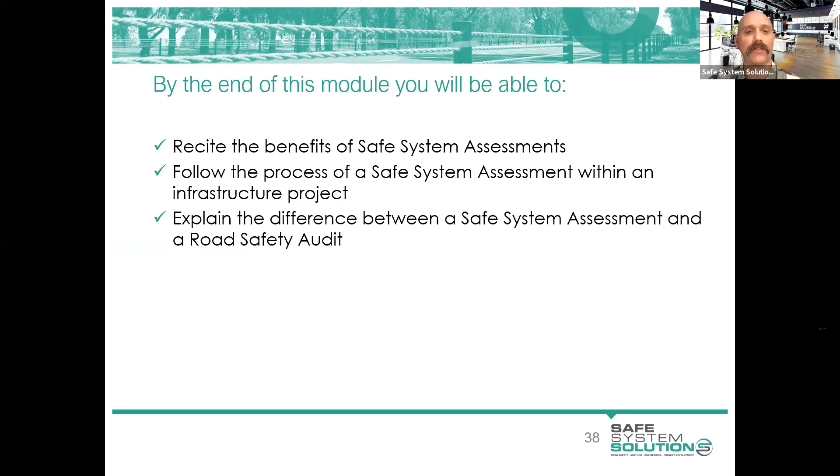So this module really is talking about that process and wrapping everything up. We want to talk a little bit about the benefits of a safe system assessment, and I'll show you some research that was done in terms of evaluation of safe system assessments. We'll look at how a safe system assessment fits within the life cycle of an infrastructure project, and the difference between safe system assessments and road safety audits, which we've talked a little bit about.

What the evaluation of the effectiveness of these safe system assessments did was take all of those and use a crash prediction model to look at how many fatal and serious injuries we would predict on these roads over a 20-year period. So there's the existing roads if no projects or alterations were done, the original design handed over to be safe system assessed, and then the high safe system alignment one from the safe system assessment, what the safe system assessors were recommending, with some acknowledgement of the context of the project, and what would generally be pushing boundaries but still possible.

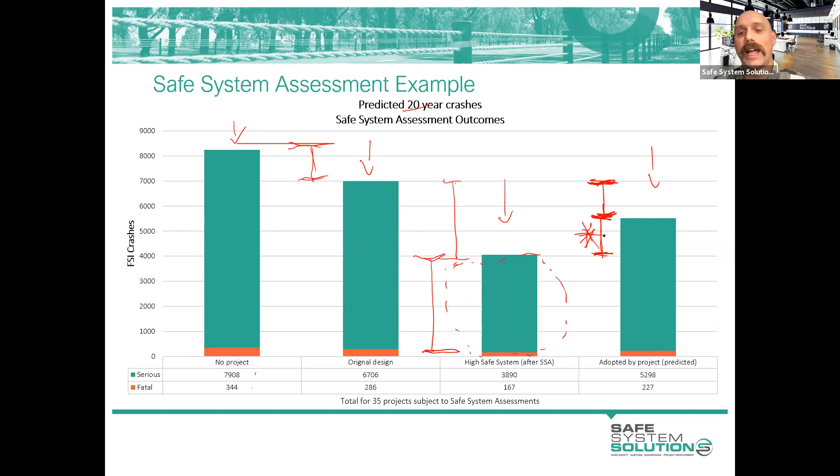Cost certainly was an element in some of these, not all of them. In terms of, they said, well, we'd like to do that, we can't afford it. Maybe grade separating some of the interchanges that were proposed. But certainly there are a lot of things that can be done in that space.

There were a number of the safe system assessments that actually, after accepting what was put forward, would cost less. And those were mainly the big town bypasses, because the whole cross section back when these were done, maybe 4 years ago or something, but still that very much that really huge road reserve, big separated carriageways, big median in the middle, buy all the land, clear all the trees, have massive clear zones was the way that this was operating. And certainly the safe system assessment showed a much smaller cross-sectional envelope that had continuous barrier systems, which in a number of these cases would be a much cheaper solution.

So that was interesting. That one we're going to have to continue to work on and keep pushing our industry, because it's stuff that we know about now and we can do, and we may need to lobby other ways to make that happen.

Ken, can I just jump in with some clarification questions, please? Definitely. Thank you. So just whether it's crashes or people injured or killed - the 227 in the last column adopted by the project, are they fatalities or are they crashes? So they're crashes. I'll be able to forward the actual report, but my understanding was they were crashes.

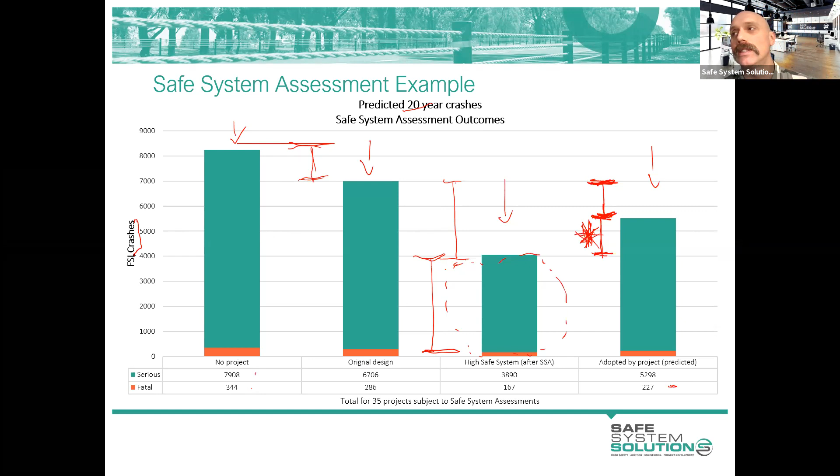So we know, well, most of these projects is sort of a 1.1 maybe in terms of crashes to people, something around that. So yes, the actual people results may be slightly higher than that, but I think this is giving a generally a fair indication of what we're up against.

Thank you. How did you derive the numbers of deaths and serious injuries? Yeah, so we did not. This was done by Blair Turner when he was at ARRB, and I think a lot of you will know Blair Turner, a New Zealander originally. Blair used basically a modified ANRAM IRAP sort of methodology based on the risk score and the predicted FSIs using those characteristics and accounting for growth as well in that.

So like the town bypass, for example, the 'no project' option was basically that all the freight and cars continue to run through the town as they currently are, and crashes are going to go up by this amount. We used the crash prediction model, combining infrastructure characteristics plus crash history, to give a predicted fatal and serious injury figure over a number of years as things go up. That was the methodology used to produce those numbers.

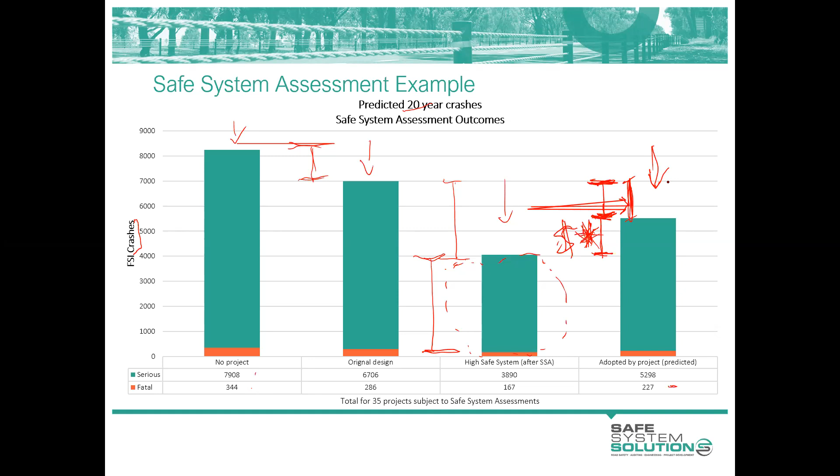Anyway, it's interesting to look at it all, and I think we've got a huge amount of work to do. That tells us a story about how much work we've got to do in a whole lot of areas. And this one, I think, is what we're going to be spending a lot of time focusing on — getting our own backyard in order, getting some politicians on board, looking for some courageous leadership, and pushing things pretty hard.

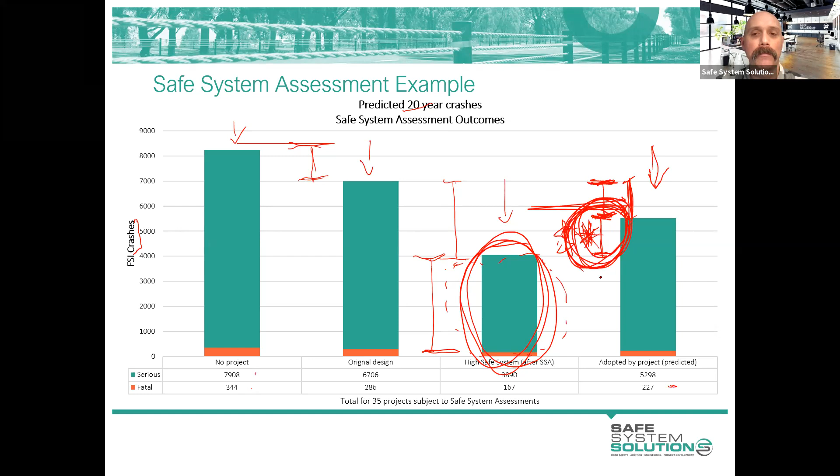Some of the benefits, just dot pointed here, and lots of words on this, but I think you hopefully will have seen that a safe system assessment is a way of determining how well a project aligns with safe system principles. It's not giving a tick or a cross, as in that is safe system or that's not safe system. It's saying this one aligns very well with safe system principles, this one not as well.

Method for comparing project design options from a safe system perspective. I do really like that when you're in there at those stages of a project development where they're doing their optioneering. They've got 5 options on the table, and you're able to show which one aligns better with safe system principles.

But you don't end there. You're also saying for each of them, or their chosen one, these are other things that can be done to get it to align better with safe system principles. And certainly, I don't think a road safety audit ever really does that comparative analysis. It shouldn't. That's sort of part of what road safety auditing is not—it's not a way to compare projects, but this does some of that comparative analysis.

Information on design changes that will move a project closer to the safe system objective of eliminating the risk of fatalities and serious injuries. So yeah, just injecting those things to further move things along. Method for assisting planners, designers, project managers to move their projects from this safe system theory to practice.

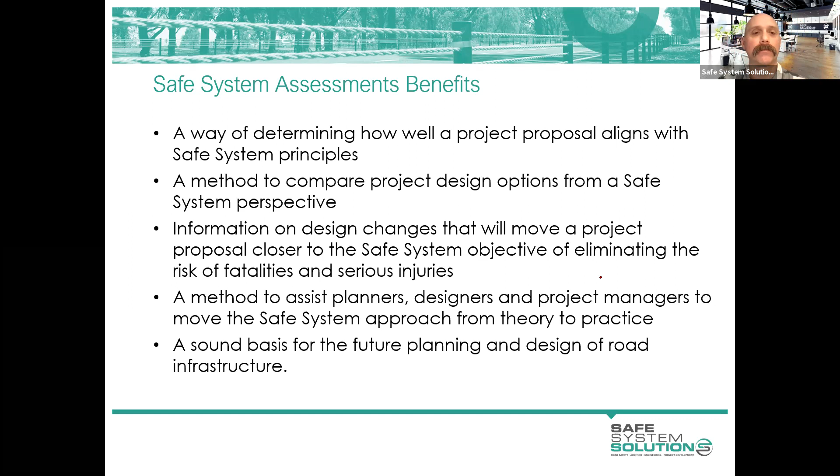Any questions at this stage, Kathy? No, just some more commentary on Japan, I'm afraid.

Okay, well that's all good. All right, so I want to show you through some process guidance, almost policy related stuff as well, and get you to be ready to get out there and really implement safe system assessments in New Zealand in the most effective way.

We don't want them done if they're not going to be adding value, and that's really pretty much it—you don't want to be adding red tape to an infrastructure project.

Early stages, these safe system assessments are really providing that value. And we feel that they're not quite the right tool once you're into the details of a project and the detailed design. That's one where past experience has come into play.

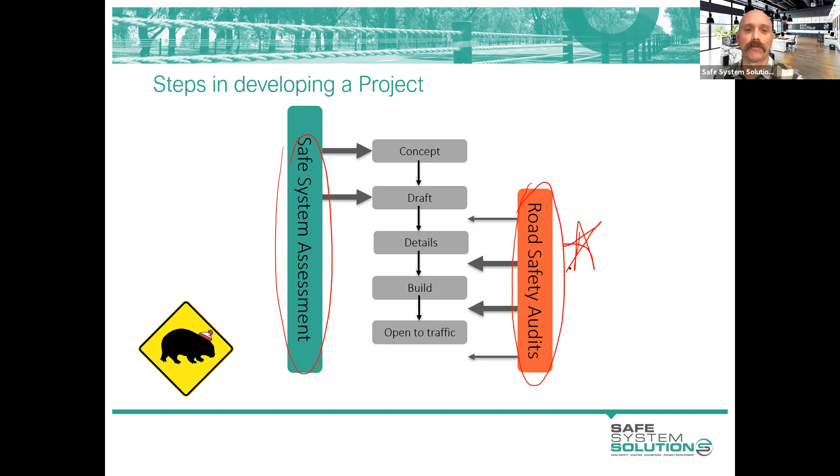And you sort of go, well, bloody hell, okay - we're de-scoping now the project from safety features that we know are proven. Now that's just a capability and capacity issue with road safety auditors in safe system knowledge and the most current road safety infrastructure thinking and the like. So that's how that one really needs to be worked - but also them referring back to any safe system assessment done at an earlier stage to understand what's being pushed, and maybe have that discussion with the safe system assessor rather than de-scoping a project like that or changing it.

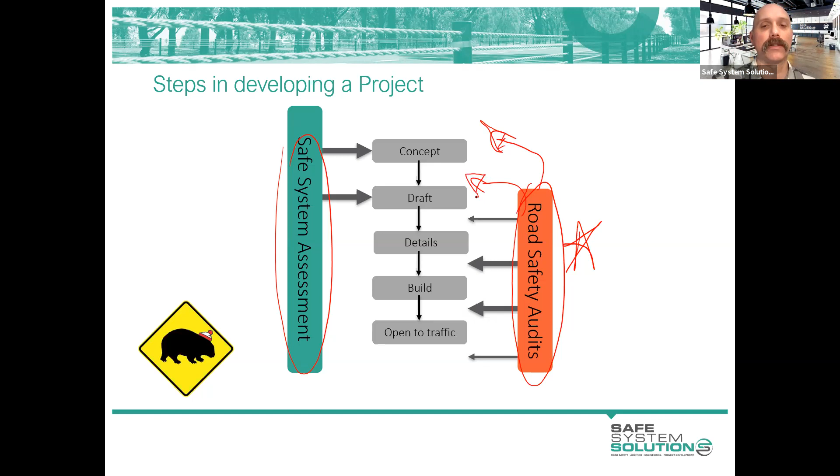Identify issues that deal with the likelihood of crashes - well, both a road safety audit and a safe system assessment do that in a really good way. And I'd dare say that likelihood cell or row of your matrix in a safe system assessment is very close to a road safety audit in a traditional sense.

The severity is sometimes looked at in a road safety audit, always looked at in a safe system assessment. I say sometimes because it's certainly part of risk assessment to look at severity, but sometimes it's ignored in the sense that a road user would have to have error in order for that severity to precipitate, if that makes sense.

The classic example being red light traffic signals on a high-speed road - piles and piles of audits coming in that don't at all mention running of the red light in terms of severity aspects. They're all about the likelihood - sight distance to the signals, use of mast arms or LEDs, line marking on the approach - and then it's sort of ignored once the red light running happens.

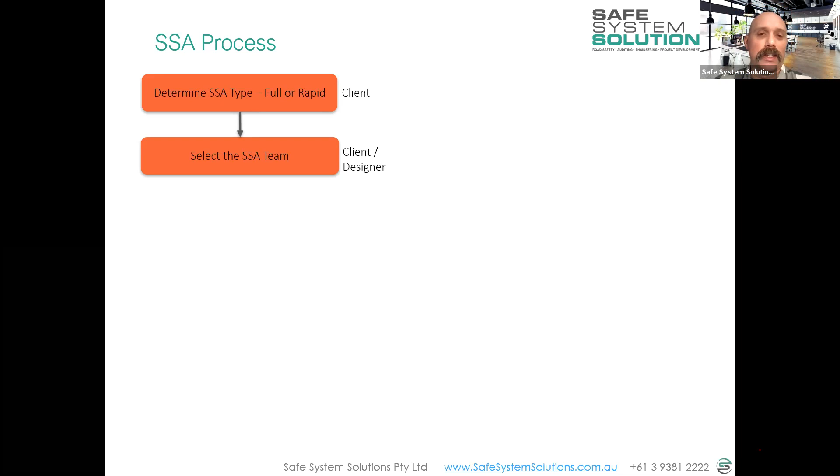And then the assessment team is selected. In terms of how do they know that somebody's got a base level of competency in safe system assessments, again there's not much out there. Victoria publishes a list of recommended safe system assessors, which I'll show you where that is shortly, and South Australia is about to do the same. But no other jurisdictions have really got on to doing that. Certainly I know that New Zealand doesn't go down the track of publishing a register of road safety auditors, so I'm not sure you'll go down the track of publishing a list of safe system assessors if you're not doing it for auditors. And there's administrative challenges associated with doing that, of course.

Then there's some sort of commencement meeting or discussion between the designers and the client, in this case the project manager of the project, and the assessment team. This can often be done in the same package where you're defining and understanding the project context, as we talked about last module, where we were honing into what's the purpose of the project, what's the function of the road, what are the volumes, why is this being done here, all of that sort of stuff.

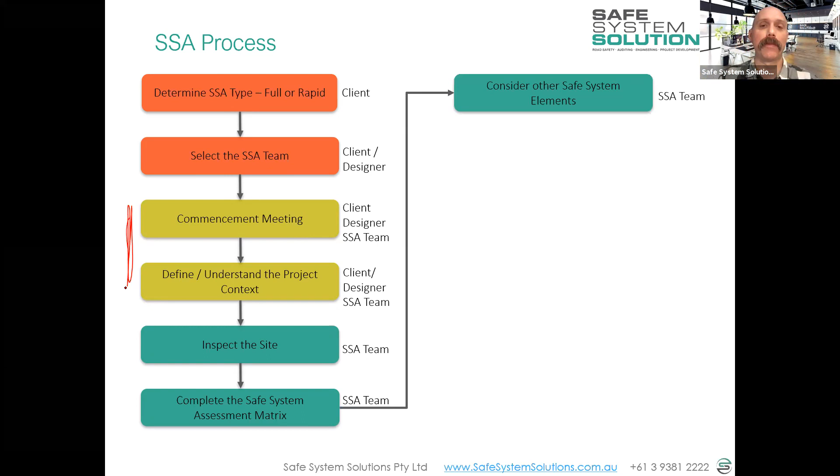Then you're inspecting the site, and some of you have done that already for your mock one, but others gain that sort of better understanding again. You complete the safe system assessment matrix, consider the other safe system elements in terms of those qualitative questions, and identify anything else that you would like to add that improves alignment with safe system principles.

You document all this in a report, and now we're at the stage where there's templates available, as you've seen, at least from Victoria, and certainly you're welcome to copy ours, which is basically the same. But we do want that consistency in reporting, it helps out.

And then it's handed over to the client, and it's over to them to fill out that column of the table of recommendations or ideas for consideration and respond to some of these. Now, what actually happens there in terms of handed back to the safe system assessment team or the like, who knows? A bit like, I suppose, a road safety audit - it's over to the client, and it's up to them to take that and make the most of it. The assessor has really sort of done their job there, haven't they?

And then amendments are made, alterations, and incorporated in. So actually, I'm going to go back here. So at this point, sometimes it goes back to here, when they say, yep, we are going to do this, and this one of what you have recommended, we're not going to do this, this, or this. Can you please rescore it and give us a final score in terms of how our final design has improved alignment with safe system principles.

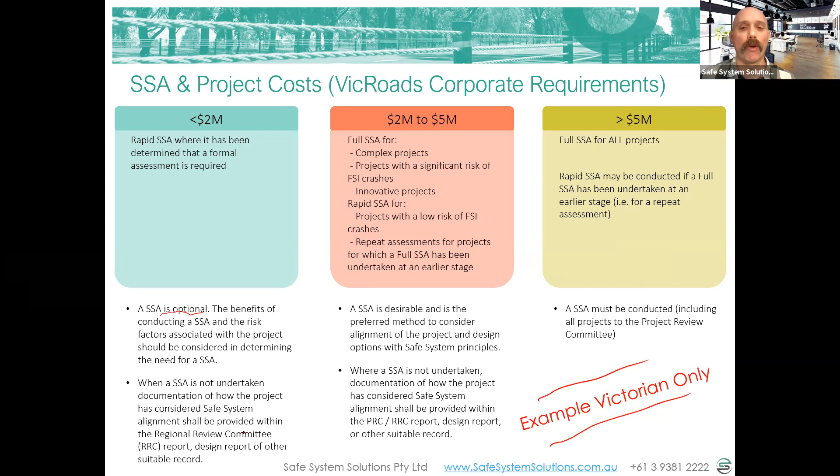Each individual road, they don't want to do a safe system assessment on each one. They've done a program one, so each project doesn't get one, they just put in the program safe system assessment. There'd be case-by-case situations where you might get advantage out of doing a safe system assessment on that, but you can see the dollars will rack up pretty quick - are you going to get great value in going through that whole process?

Between 2 and 5 million, a full safe system assessment for complex projects or projects with significant fatal serious injury risk, or anything innovative. And rapid for projects with low FSI risk, or any repeat safe system assessments after that full assessment has been done - it's desirable and the preferred method. And again, if for some reason it's not done, it needs to be documented why, although this is - pushing into it - very much should be done.

And then above 5 million, full safe system assessments for all, and rapid if a full safe system assessment has been done and there's a repeat assessment happening because of alterations or the like - and it must be completed there, so must is the word. So that's a very traditional way to do an infrastructure assessment review style policy, peg it back to total estimated cost of the project, and make your decisions accordingly. There's many other ways that it could be done, and it's for you to play out.

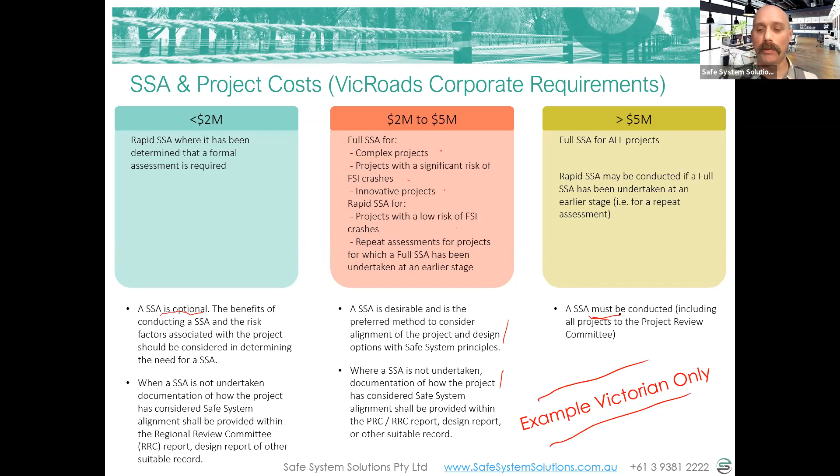I thought I'd show you that out of interest, and I'll show you the difference between a full safe system assessment and a rapid safe system assessment - again, example, and this is actually Victorian and South Australian as well. So a full safe system assessment goes through everything that we've talked about, everything that was in that diagram. The rapid safe system assessment doesn't - you don't necessarily have that workshop or initial meeting as such, it can be handed over and off you go. You are going to want to get some of that background context somehow, but it might be just on a lesser scale.

The site inspection becomes an optional thing in a rapid safe system assessment, so you don't need to do the site inspection. Often in rapid, still you do a site inspection anyway, but it's an optional thing. You don't need to do that.

You still do the matrix, but the other thing about a rapid safe system assessment is you don't consider those other elements, those qualitative questions that we went through. You just stick to the matrix, and that's it. But you still provide those recommendations for any changes or things to consider, and it's treated accordingly. So there is a difference in the resources required, the time, the effort, the cost between the two, but they're not poles apart.

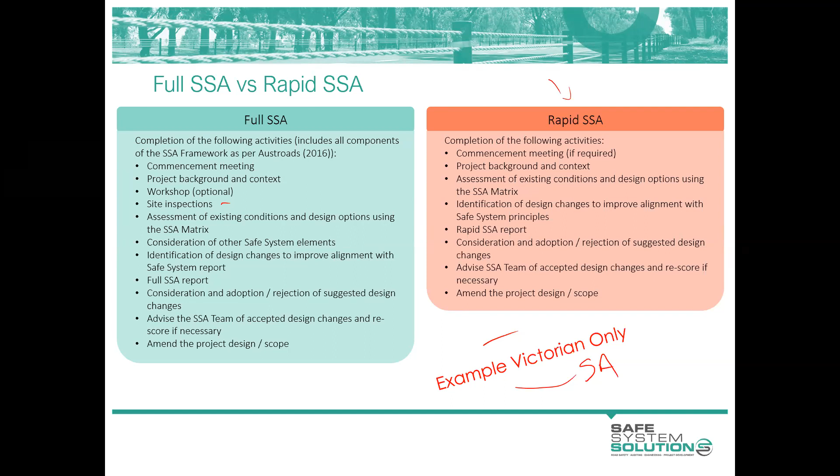Question, Ken, to confirm, did we need to do a site visit in the rapid safe system assessment? Good question. And the answer is no, you don't have to. You may elect to. So the rapid does not require a site inspection, but it's optional.

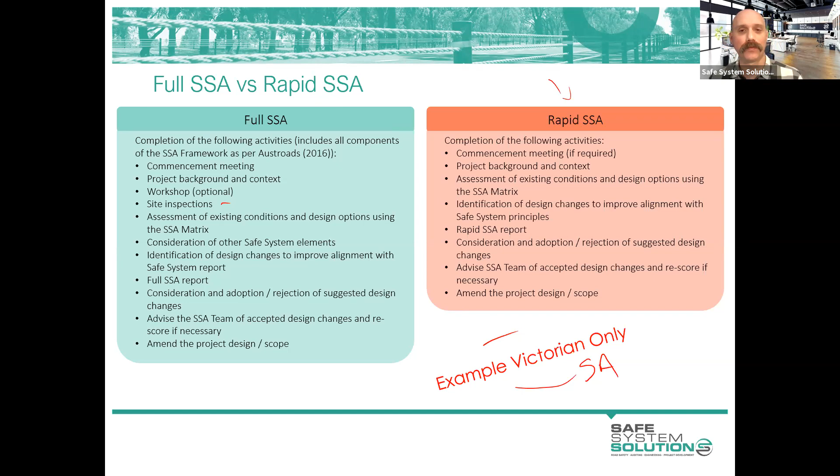Any other questions come through there, Kathy? Not at the minute. We're good at the minute.

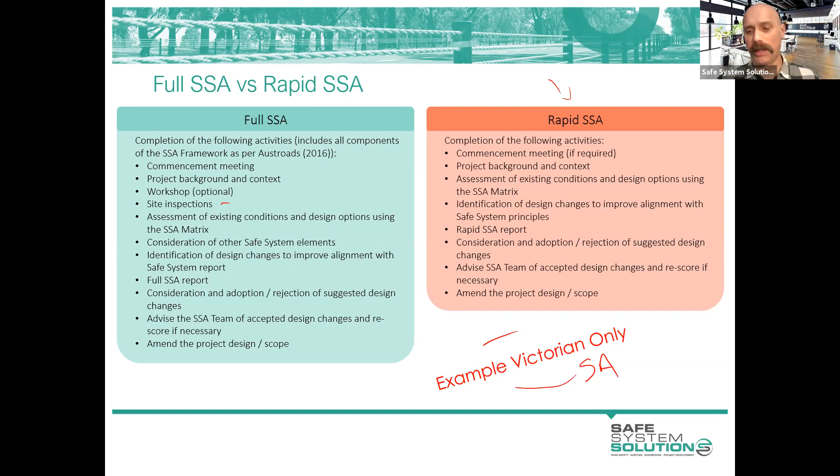Okay. Well, I think it's probably a good opportunity to jump into some of these, I suppose, different cross-sectional environments, or sorry, stereotypical environments, I suppose I should call them, and just have a general discussion about how we would make these areas higher aligned with safe system principles using the tools in the toolkit we have at the moment.

And I thought I'd try to cover off these different road environments: residential, shopping strips, mixed use arterials, low volume rural roads, high volume rural roads, high volume outer suburban arterials, major urban freeways, major rural highways. So I think that fairly much covers all the road environments that we've got. Others might think of something else that I've missed.

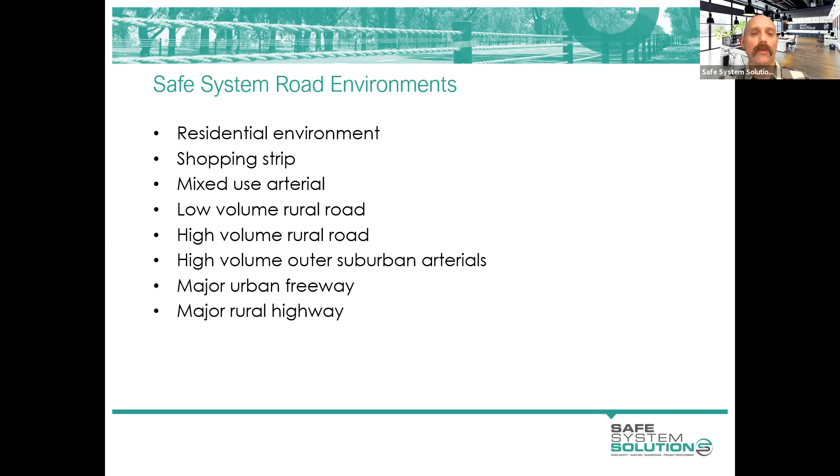But what I wanted to do is just pop up an environment like this for each of them, just a random photo that we've taken somewhere, and get some input from the group, typing in what sort of changes could we make to these road environments, features that could be added, alterations that would give us higher alignment with safe system principles. And this would really come about after you've scored it, used the matrix, and then you're recommending any alterations and changes.

So, of course, what I do want to keep you always thinking: exposure, likelihood, and severity. Anything that you recommend or any idea you have in alterations, tell me if it influences the exposure, the likelihood, or the severity.

Ken, could we, whilst people are typing that in, have a question about SSA and RSA comparison? Yeah. Severity of crashes in a motorway situation, we'll have one non-injury crash create kilometres of queuing with injury crashes in the downstream. How do you apply a safe system to a project where the influence area is huge? Yeah, it's a challenging one.

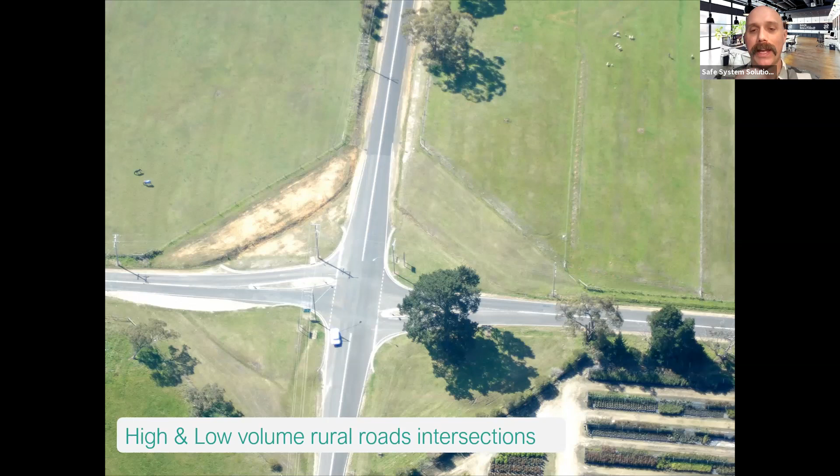Okay, great stuff coming in again. Getting some commentary around roundabout - oh no, that's probably from the last one.

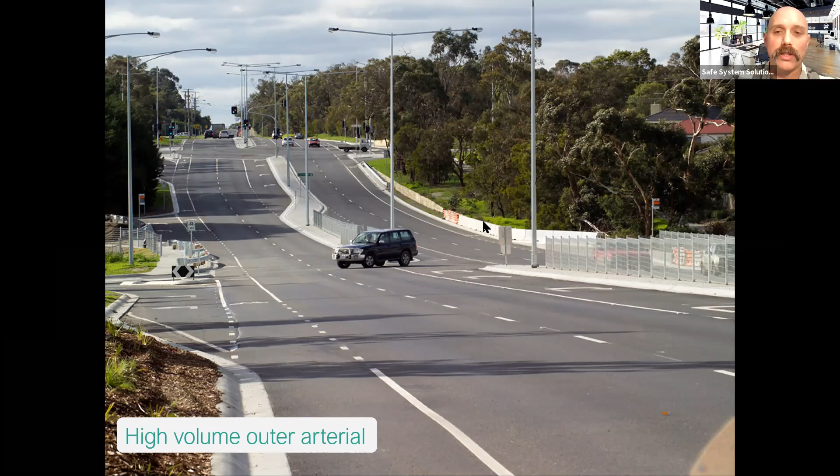Okay, really great stuff there, and I think I'll keep moving on - there's lots and lots of really good things in there.

Okay, these major urban freeways or motorways - we talked a little bit about how to do the assessment and where you'd draw lines, but generally these align quite well with safe system principles in terms of separation of traffic streams, good angles at intersections, and on-ramps getting speeds similar. They perform extremely well from a safety perspective for most of their operation - when operating free flow, very good in general, and when absolutely stuffed, again pretty good from a death and serious injury perspective, because nobody's going fast enough to bring up that energy.

It's as these freeways tend to break down that they have trauma troubles, so the idea of managed motorways, being more attentive to the needs of the motorway, managing speeds before incidents, back of queue, ramp metering and the like - all really to try and lessen the likelihood of crashes, but also sometimes the severity by managing speeds on the approach to incidents. They can be challenging to work with, but there's a fair bit we can continue to do. It's moving us more into that ITS style space.